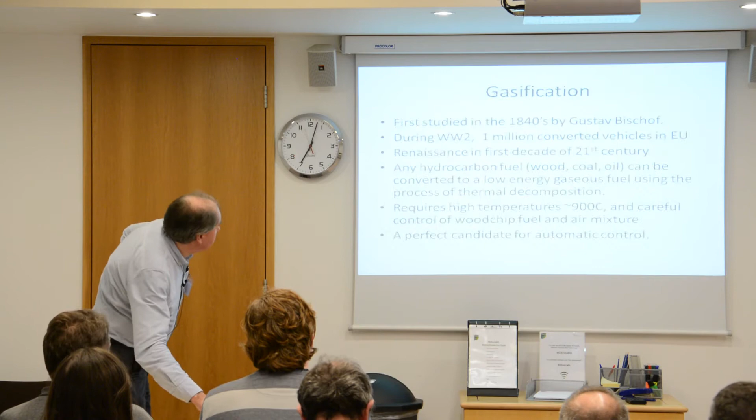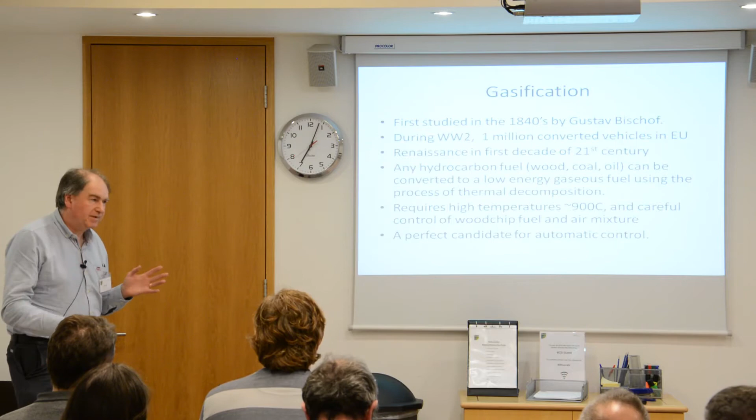Okay, so gasification was first studied properly in the 1840s by Gustav Bischof. Prior to that, a lot of research into combustion and the chemistry of carbon had been done by the metallurgy industry. Hot carbon is great at reducing metal ores down to their metallic elemental state, and so it was people that were in the metal industries, and also even the village blacksmith, who knew a lot more about the chemistry of carbon than most people today.

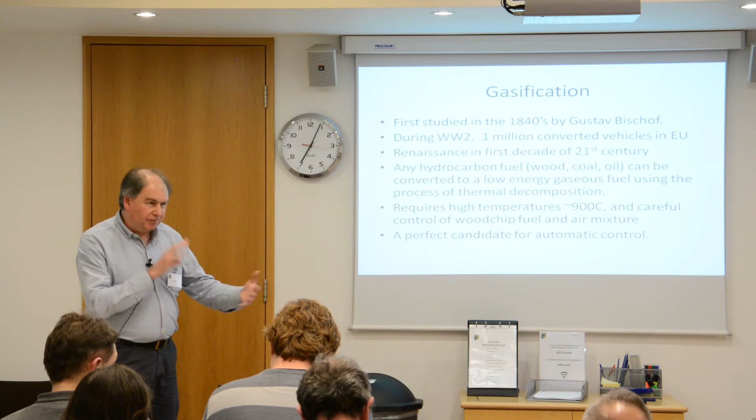Converting a solid fuel into a gas is a great way of making it more useful. Solid fuels are hard work. You've got all sorts of problems like mechanical handling problems, storage. They often don't produce a consistent thermal output.

But if you can convert, let's say, woody biomass into a flammable gas, you can then pipe that gas into a secondary combustion zone, and you can burn it with the right ratio of preheated air, and you can get a very intense flame from it. Conversely, you can pipe it into the air intake of a regular petrol engine, mix it with the right amount of air, and you can run the engine on it.

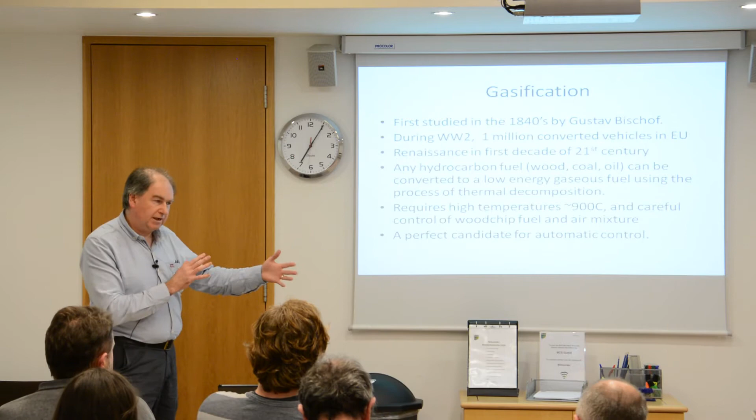Now, during World War II, when hydrocarbons were in short supply, there were a lot of acts of desperation to try and maintain public transport and personal transport, and a lot of vehicles were converted, particularly in the northern countries of Europe, Scandinavia, Germany, Poland, Austria. They were converted in really quite large numbers by the mainstream motor manufacturers of the day to have a gasifier on them.

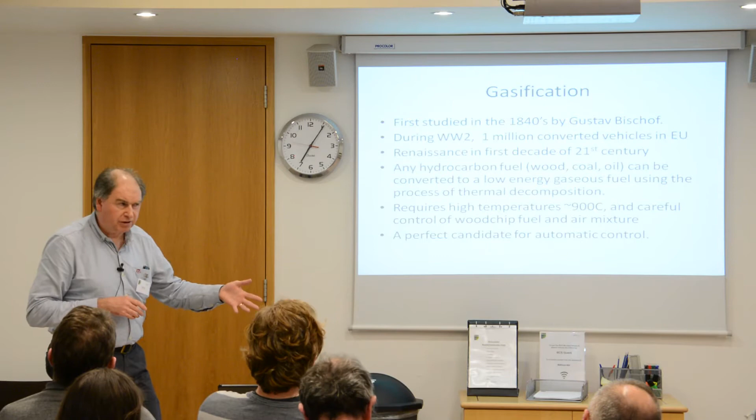Audi and I think it was MAN trucks were producing wood gas powered trucks off their production line for the German army from about 1941 onwards. In total, there were 1 million vehicles converted in the whole of Europe. Now, how far can you drive a truck on wood?

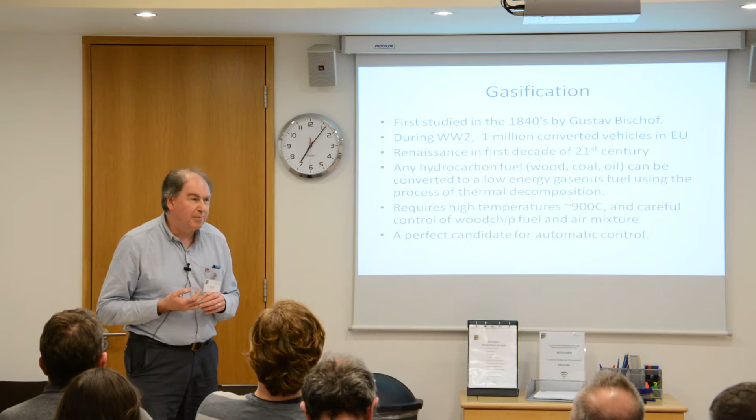Well, we were talking about energy densities recently, and if you take a 15-inch length of 4x2, and I'm sure we all know what 4x2 is, there's enough energy in that to drive a 2-ton pickup truck a mile. So about 900 grams of wood will produce about a mile in a pickup truck at, let's say, 55 miles per hour through the gasification process.

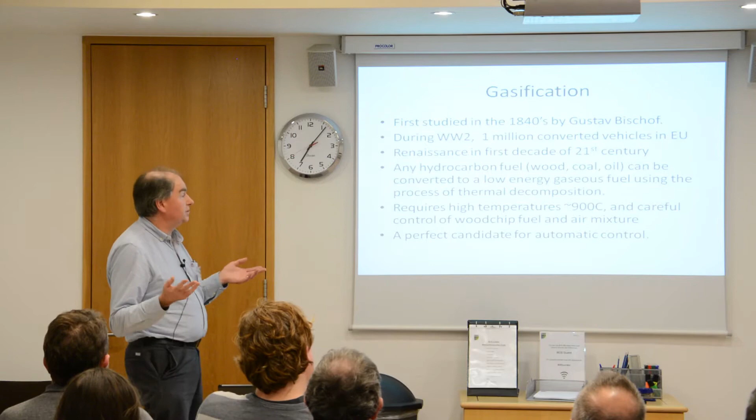So any hydrocarbon fuel can be converted into this low-energy gas using the process of thermal decomposition. Now, I said earlier that this is the art of taming the combustion process so that it yields intermediate byproducts of combustion that are useful, rather than fully oxidizing those chemicals and producing just heat and carbon dioxide. So it's like taking out what you need from the thermal process before the fire has a chance to fully consume those products. So basically, the gasification process involves burning, let's say, wood chips in an oxygen-reduced atmosphere.

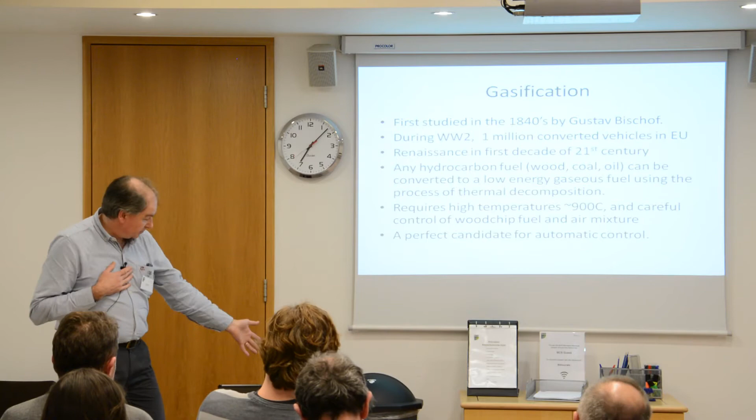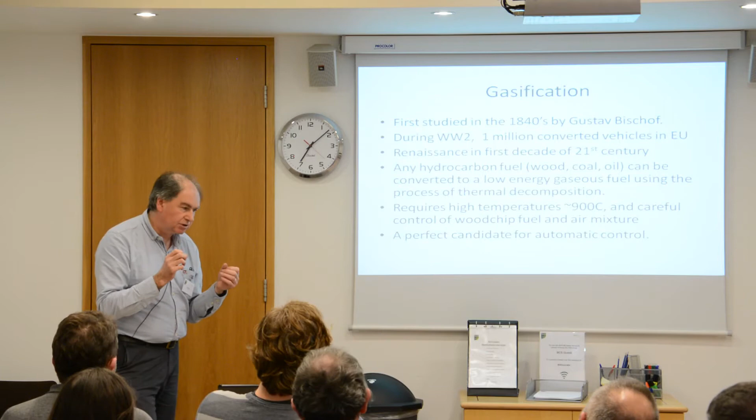And you have a reactor vessel that's about the size of that waste paper bin, and you put biomass in the top, and about a third of the way up from the bottom you have air nozzles going in, and those air nozzles will draw air in to a combustion area, and you're only putting about 25% of the air required for 100% combustion. And this means that only 25% of your fuel will be fully combusted, creates a lot of heat, and the remaining 75% of your fuel will be thermally decomposed into the flammable gases that you want.

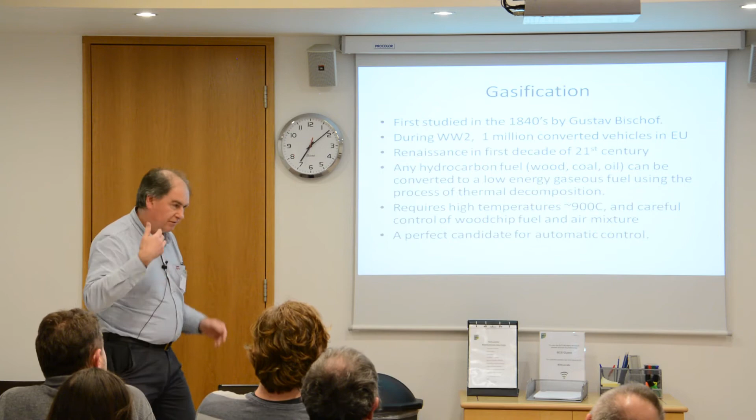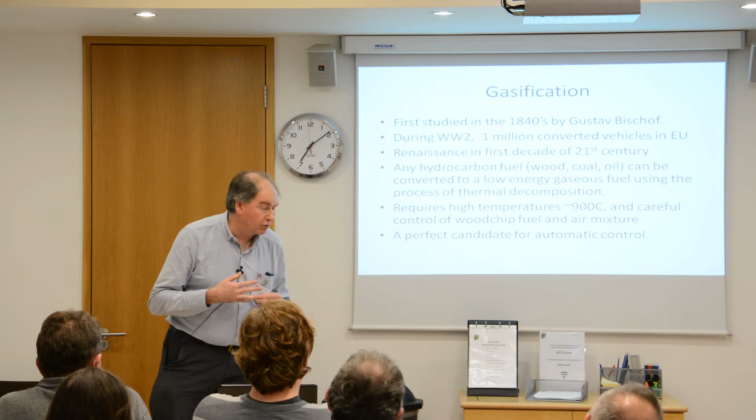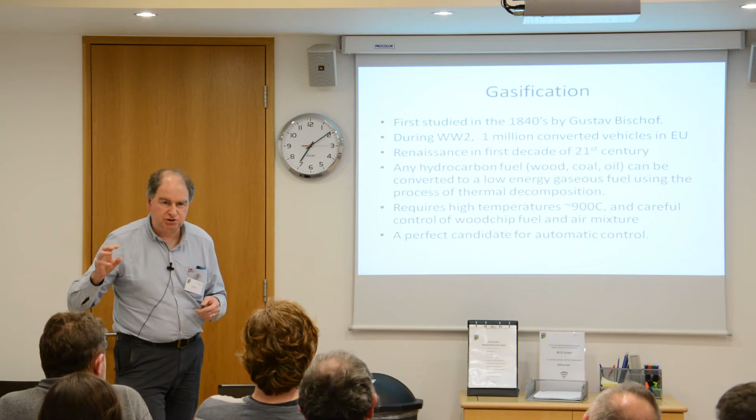Gasification is a tricky process to get right. You have to firstly get your gasifier running optimally so that it produces good quality gas, and given half a chance, they will just try to fully combust your fuel stock. And secondly, you are running a petrol engine on a gas that is not really of a very consistent calorific value. And so the best way to deal with this is to put some simple electronic controls in there to control the amount of air that's drawn into your gasifier, and also to control the mixture of the gas and the air that goes into the air intake of your engine. So it's a perfect candidate for automatic control.

Okay, chemistry of gasification. I think I've said most of this. Wood gas is effectively, the best way of thinking about it is when you're having a tidy up in your garden in the autumn and you've got a bonfire going, and you pick up a whole bunch of leaves or dead wood or whatever, and you dump it on the bonfire, and it smokes with horrible yellow, green, mucky, brown smoke for about 2 or 3 minutes, and then all of a sudden it goes whoosh like that. Well, that horrible green stuff, that is the tars and the volatiles coming out of the biomass. You have effectively choked that fire.

You are running it at an oxygen-depleted state. It's running very, very rich, and when you run any thermal process rich, you get a lot of unburnt volatile matter, or even unburnt hydrocarbons. And then as the thermal decomposition process increases and that overload of damp fuel reaches the optimum temperature, and you have more oxygen reaching the horrible yellow smoke, you get the right fuel-air mix for the smoke to burn, and all of a sudden you get an almost explosive flare-up. Well, that is the wood gas reaching its optimum stoichiometric mixture, and it's something that you see if you run a wood stove or a bonfire in your garden. You see that quite often.

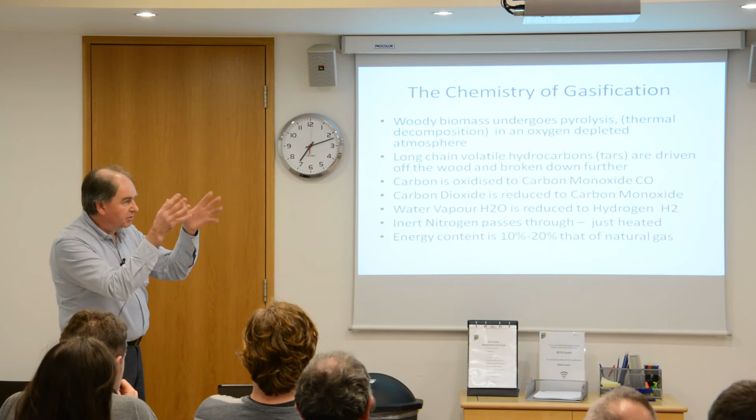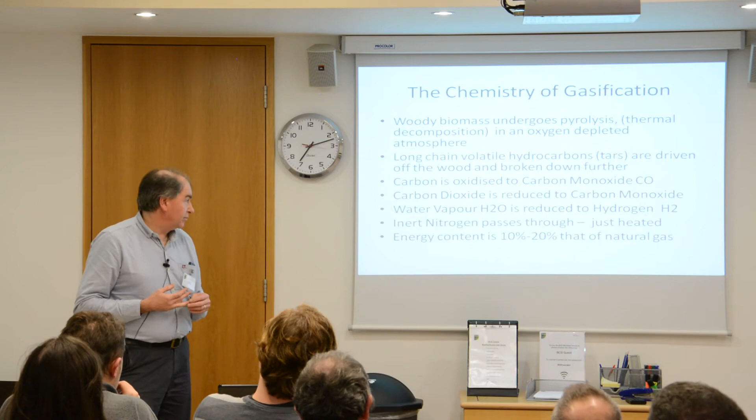That is released, and that is reduced by passing, by that time it's superheated steam, and it passes over the hot carbon bed within the gasifier, and that forms hydrogen. Good old nitrogen, that just goes straight through and just picks up a lot of heat. And the energy content is anywhere between about a fifth and a tenth that of natural gas.

Now, one thing that isn't widely known is that there was a whole industry in Germany cutting up pine forests to make little cubes of highly specified standard fuel wood. And there were probably about 2 centimeter cubes, and dozens of factories had wood processing machinery that was putting pine trees in and getting 2 centimeter cubes out. And garages that had been selling petrol were then selling wood chips, wood blocks.

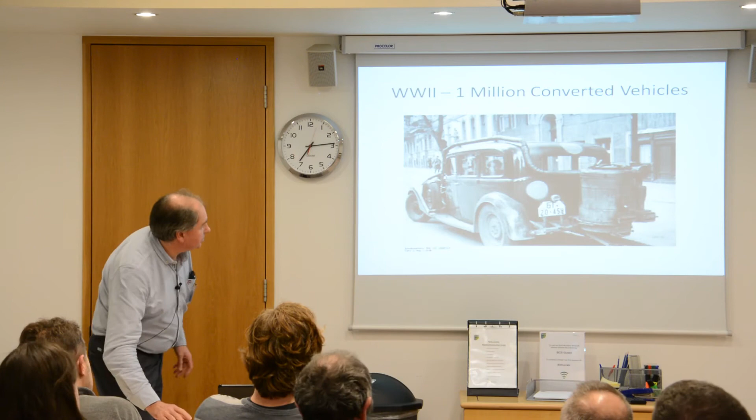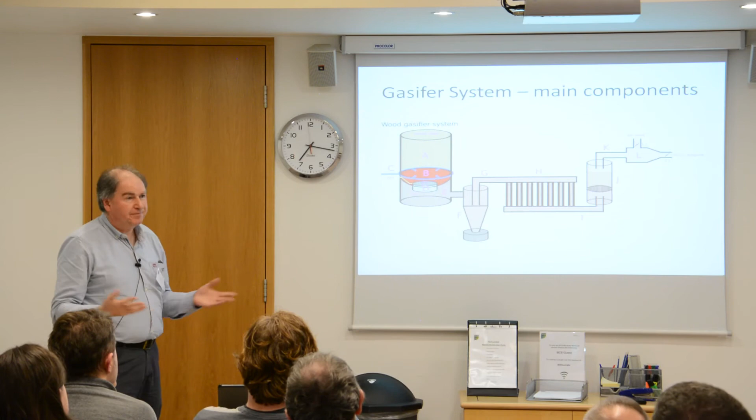So that's basically what any gasifier system has. Now, you need all that to bolt on to an existing generator set before you can do anything. And that little lot is 2 vessels about the size of that waste paper bin, and what's not shown on the top here is a wood chip hopper, which consider it to be something like a standard 210-litre oil drum. A 210-litre oil drum will produce about 24 kilowatt hours of electricity.

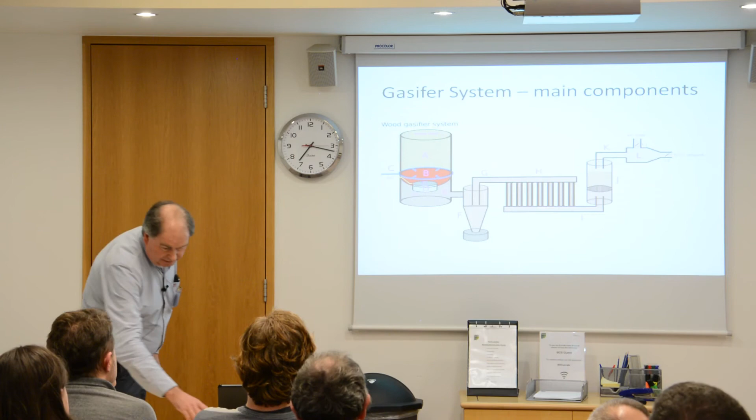Okay, right, automating the system. Mechanical handling, we need an automatic fuel feed auger to add the wood chips into the top of the gasifier. At the bottom of the gasifier, we need something that shakes the grate, removes the dust and ashes, and makes sure that you've got good gas flow out through the bottom of the gasifier.

Temperature monitoring, you need probably about 3 thermocouples capable of 1300 degrees C operation in order to monitor the temperature at the top of the reactor, the bottom of the reactor, and preferably the gas temperature as it goes into the engine.

Pressure monitoring, if your gasifier becomes blocked with charcoal dust, it will have a greater pressure drop across it. And we use some simple machined silicon beam pressure sensors so that we can work out the pressure difference across the gasifier. And if the pressure ratio across the gasifier appears to be increasing, we shake the grate to try and relieve the blockage.

When you start up the gasifier, you've got a lot of yellow smoke to get rid of, and so we normally put that up the exhaust pipe, and we have a high temperature heating element that will automatically ignite those noxious gases and flare them off until we get good engine grade gas.

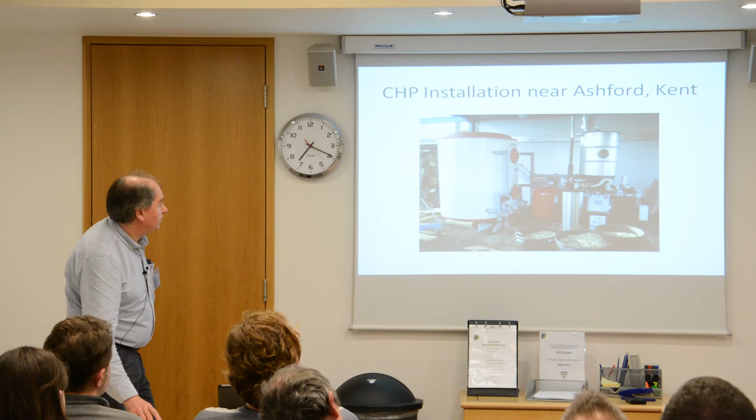We've got blower fans, we have a lambda sensor so that we can detect how rich the engine is burning, what excess oxygen is left in the exhaust, and from that we then use that to control the mixer valve. And the air gas mixer valve, we run a PID loop and have a model radio control servo move that for us.

Okay. Here's a system I've been working on, which is installed in a property down in Kent. This is the wood hopper, this is the main filter, electronic control system, engine is over here, and this is 4 tons of water, which is acting as a thermal store.

Right, the IC engine, it's an off-the-shelf, globally sourceable engine, 3 litres, 1500 RPM, about 40 horsepower. It's got an electronic governor for maintaining 1500 RPM. We monitor the oil temperature and coolant temperature and the oil pressure, so we can shut it down if we detect any problems.

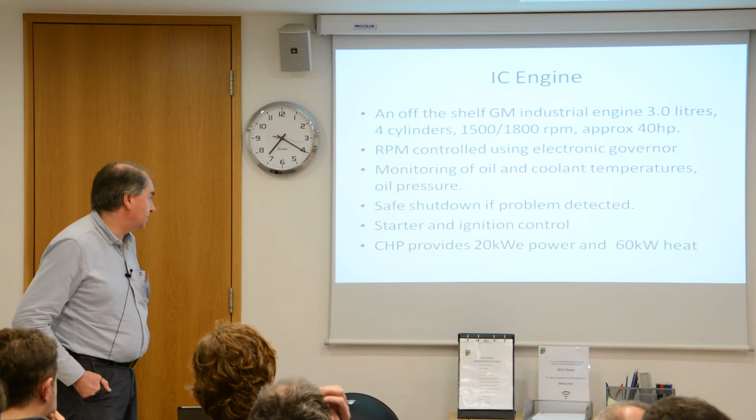We have a conventional starter and conventional electronic ignition, and this engine will produce approximately 20 kilowatts of electricity and about 60 kilowatts of heat. There's the engine. It's an old GM truck engine, a lot of old cast iron.

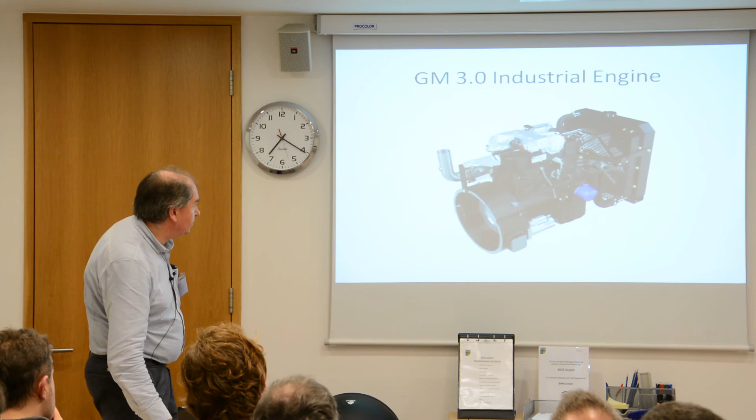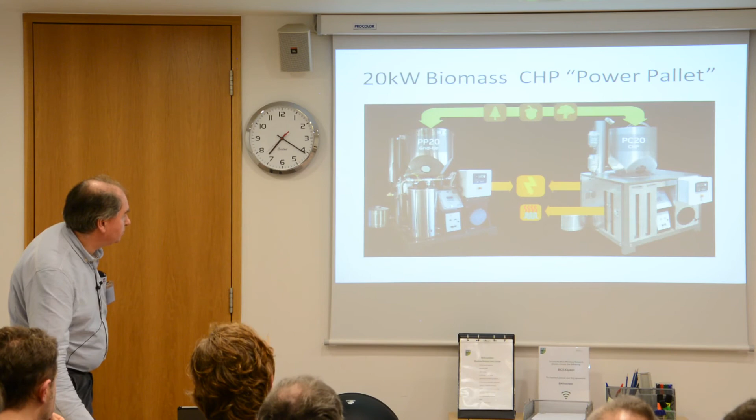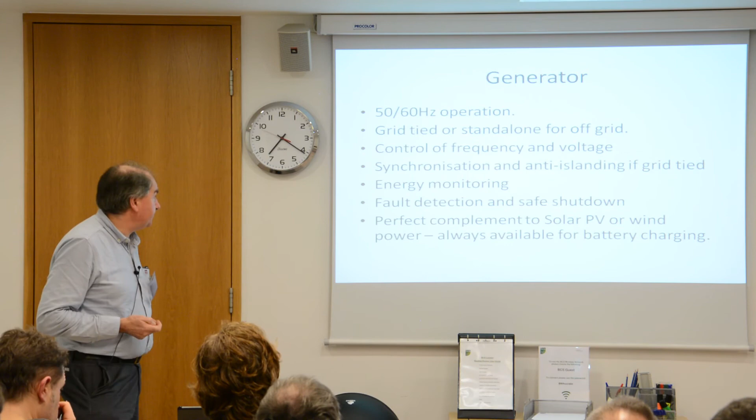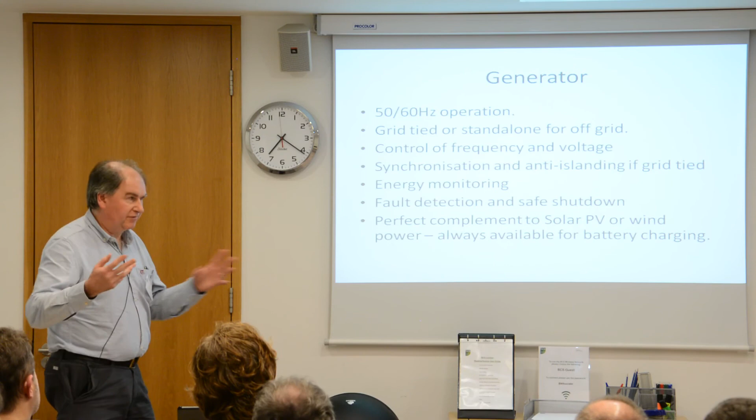Okay, this is the state of the product that I was working on out in California. I was responsible for this little bit here in the middle. Let's get on to that. The generator, off the shelf, synchronous generator. Great complement for solar PV or wind. Your wood chip generator will run when you don't have the other renewables and providing you've got wood in the hopper.

Right, sensor and control challenges. Yeah, I mentioned thermocouples running it up to 1300 degrees C. We need a thermocouple amplifier and linearization for those. We're doing multi-channel pressure monitoring. We're running a PID loop to run a servo valve. We've got multiple DC loads, a bit like a regular car.

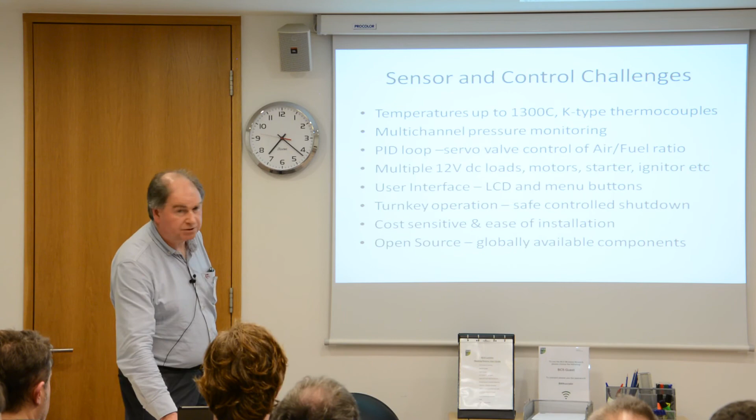We needed a user interface, which was an LCD and some menu buttons, turnkey operation, safe controlled shutdown, cost sensitive and open source using components that could be sourced globally. We chose to basically, as they say in the States, leverage off the Arduino ecosystem.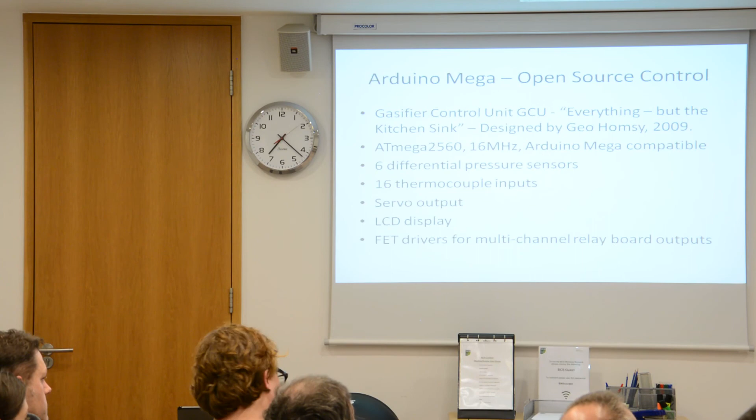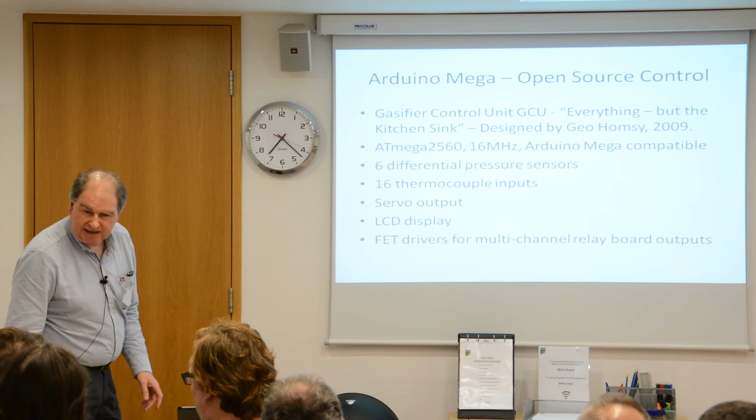We already had a microcontroller board, which I'm going to pass around so you can see it in the flesh. This is effectively an Arduino Mega that's got a lot of temperature and pressure sensing channels on and a whole lot of other stuff. That's it there.

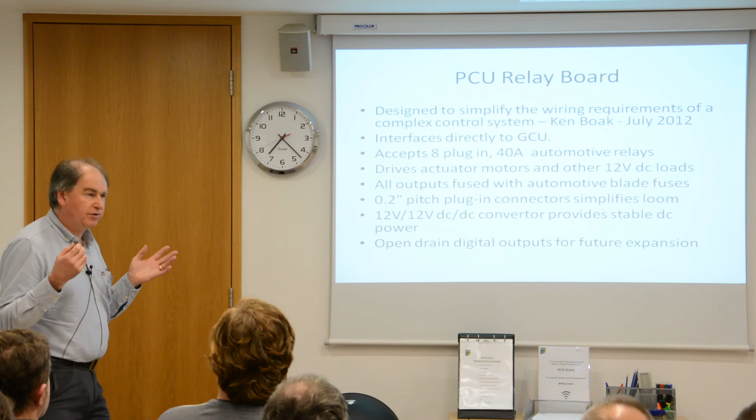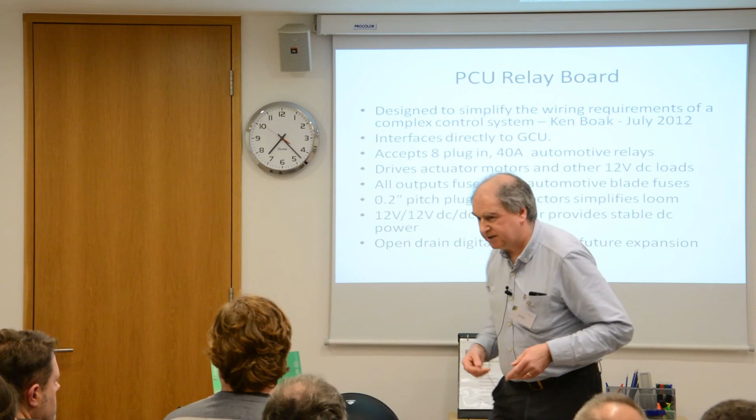And I then had to come up with a means of interfacing that board to the rest of the systems within the Gasifier. So I came up with an idea for a relay board, which I shall also pass around. This is an unpopulated one, designed in EagleCAD. It's about a 10-inch square board, cost about 60 quid in small volumes in the States.

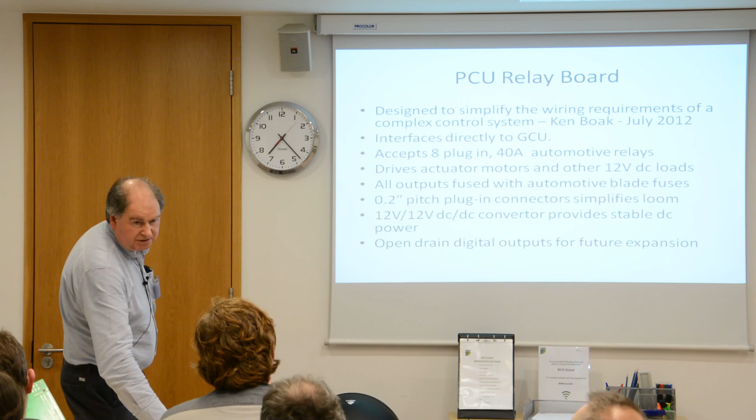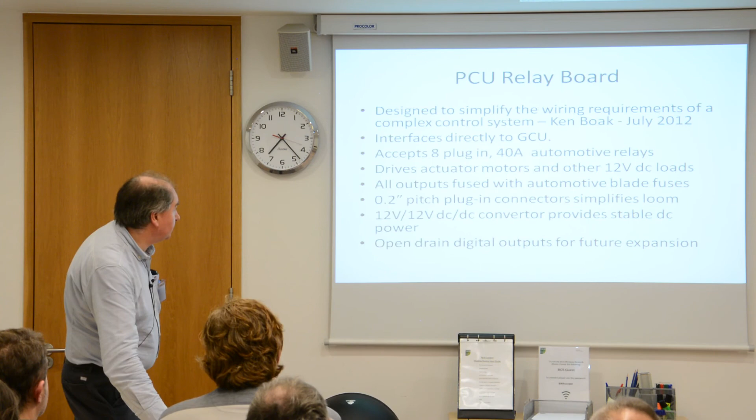It accepts standard automotive plug-in relays. It drives a lot of 12-volt loads, 0.2-inch pitch power connectors, so the thing is easy to wire up. So that was that, and that's it populated before the red board sits down on top of that.

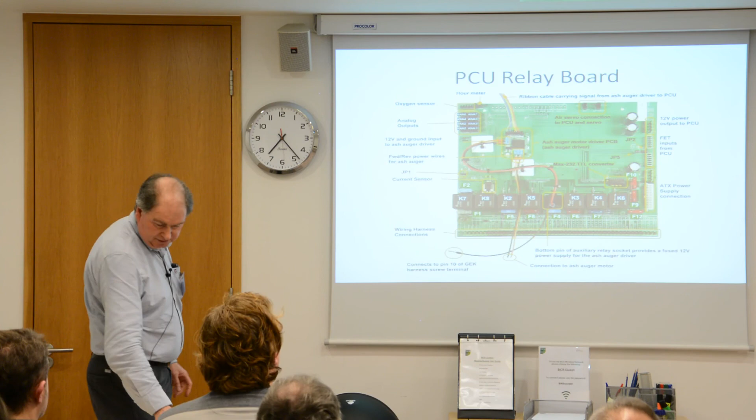Okay, the future. The Arduino Mega is looking quite old hat these days. I think we've all more or less made the transition towards 32-bit ARMs, which are fantastic value. 16 and 24-bit A to D converters are now commonplace and cheap, and very often there are 12-bit converters built into your microcontrollers.

We've moved away from the 4-line character displays, color TFT graphic displays, 2.8, 3-inch diagonal are now only about £8. We're doing a lot of web and cloud-based monitoring for remote control, remote access, Wi-Fi and low-power wireless for remote control of these systems. That also has come on in leaps and bounds and is very cheap. Higher resolution monitoring and better control from a processor that can rattle along at about 20 times the throughput of the humble ATmega.

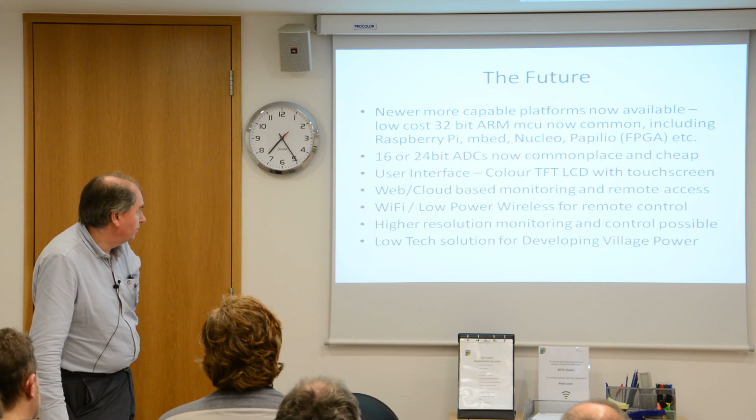Right, I'm going to try and leave 5 minutes for questions. I realize I've had to get through a fair bit.